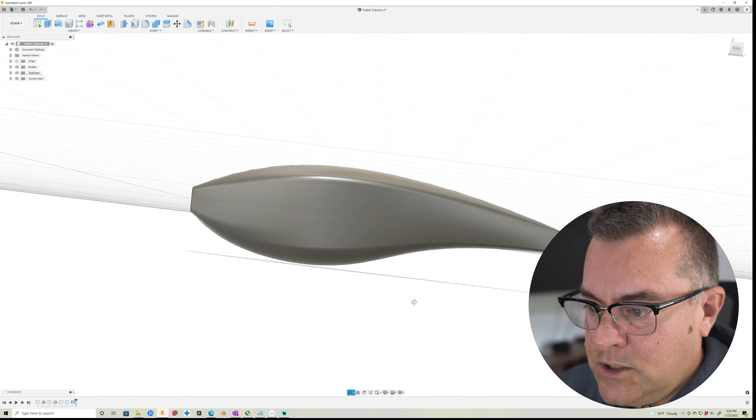Let's go. All right guys, so here's our twitch bait shape. I've messed around with it just a little bit, adjusting the curve, things like that, but it's pretty close to where we left off in the last video. What we're gonna do is break it into pieces first, and I do this to make it easier to kind of visualize the lure as it comes together and to hollow out certain sections.

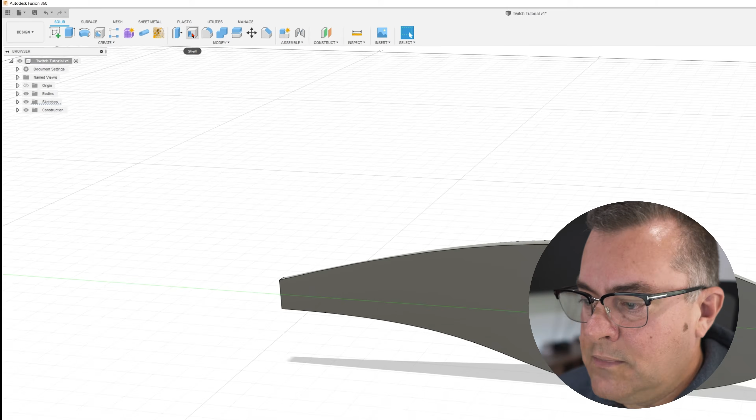Just to be clear, I wanna show you, if you wanna hollow out this whole section, we can just click on the shell tool, click on this face, and then we give it a number, which is basically the thickness of the shell. So let's just say 1.5 millimeters. It'll crunch for a while, and then I'll have a 1.5 millimeter edge all the way around, and it'll be completely hollow. So that's great if you're doing something like a topwater bait, like a popper, and you just need it to float.

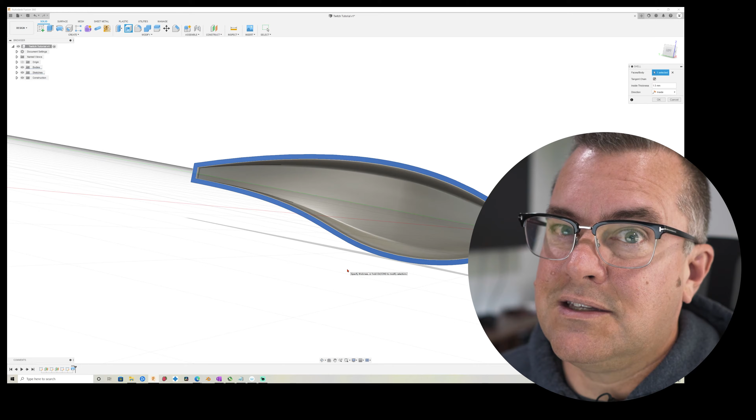Now, one thing, if you just make it hollow like this though, is it's gonna be the same buoyancy all around, and it might not sit right. It has a tendency to roll. So let's correct that. All right, I'm just gonna cancel out of that because that's not what we wanna do. I just wanna show you that bit.

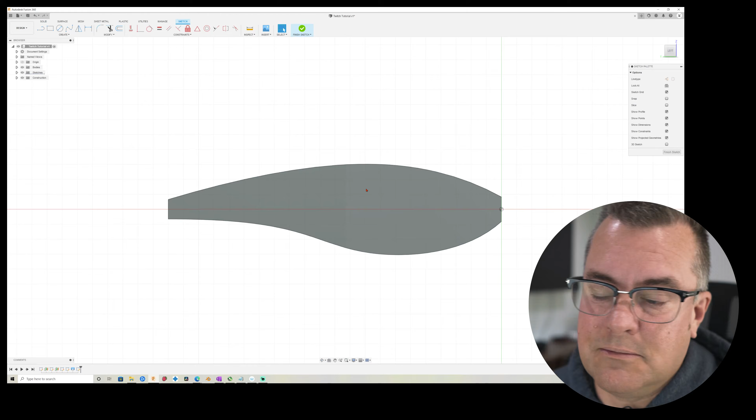So in general, when you talk about a lure, the back of the lure and the front of the lure tend to be solid, or at least more solid. And this is where we're gonna take advantage of some of the processes involved in 3D printing to give us a leg up over more traditional lure building techniques. So what I'm gonna do is just create a sketch on this plane. I could even create on that face if I wanted to. And I'm just gonna draw a line, and basically divide up the lure with these lines.

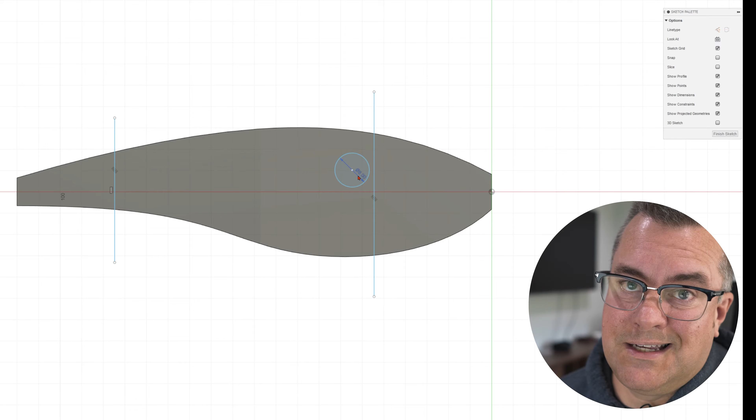Okay, and I'm actually gonna throw in an eye real quick. I'm just gonna make it an 8 millimeter circle. This will be kind of the size, whatever size you want it to be. Actually, no, I want it to be 10. And I do that for a couple of different reasons. One is it gives me an idea of where this eye will sit if I do end up wanting to make it a lure that is completely printed in one piece instead of 2.

And it gives me an idea of where in relationship to the hollow part and the solid part I'm gonna be. Now, I accidentally put a constraint on there, so I'm gonna delete that real quick. I want this eye to sit only in the solid part of the lure. So if you haven't figured out yet, I'm gonna cut this body into parts, leave this one solid, leave this one solid, and kind of hollow out this middle part to give me my buoyancy.

Now there's a lot of ways you can do buoyancy in a lure, but I'm gonna try to make it to where we don't really need to add any additional weight to have this lure act the way we want in the water, at least floating wise. All right, so I got these 2 bits in place. I think that makes sense. This is about 20 millimeters. Maybe we'll just stick it at 20 millimeters right there. And then I want to make one more line here, and I'm actually going to make this a spline.

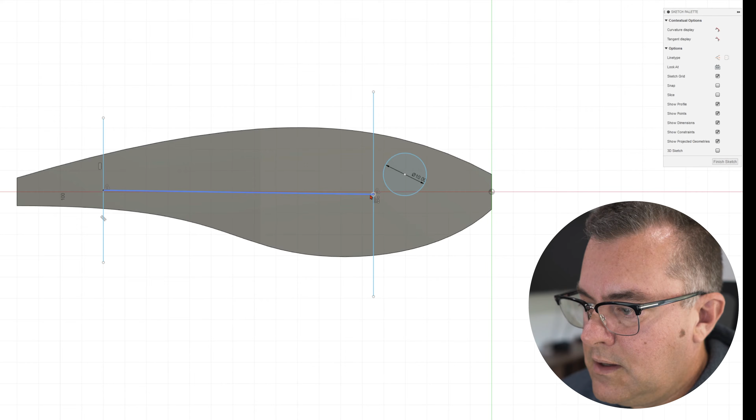I'm just going to connect that to here, hit escape, move this up, and put a little bit of a bend in it. Okay, so now I've basically laid out with these lines the parts that are solid and the parts that are going to be hollow.

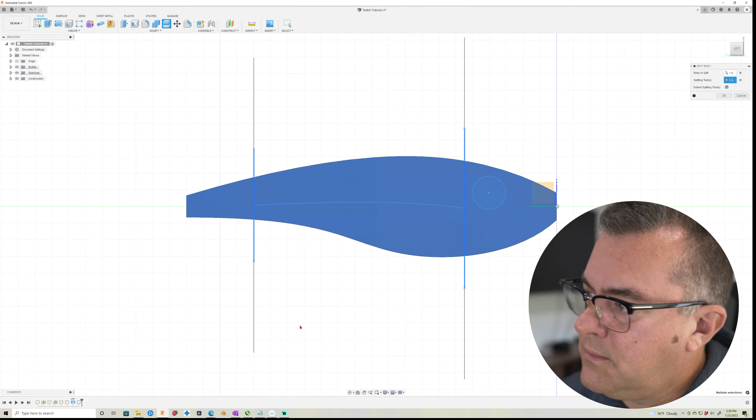Solid, solid, solid, and hollow. So now what I do is finish sketch, and I'm actually going to split this body up. Split body, splitting tools. I can use two splitting tools here because they're both going the same way. Extend splitting tools, that's fine, and we're going to split this lure like that.

Okay, so now I have 3 bodies over here. I'm going to turn off that one, that's the tail, and turn off that one, that's the head. And let's bring back our other sketch that we have here.

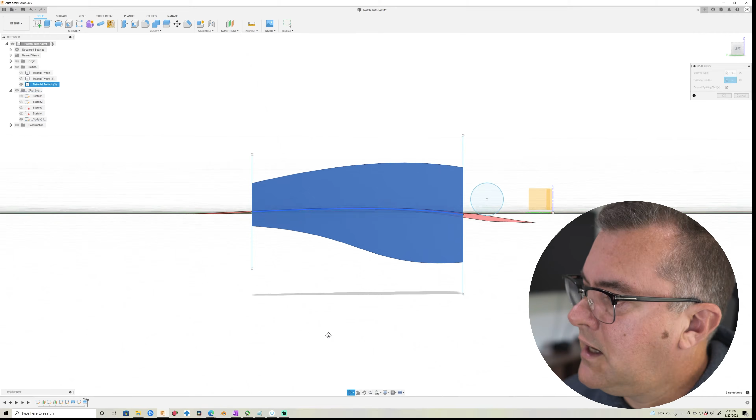Now we're just going to split this body again. Click split body, splitting tool is this line right here. You can rotate and see that. Click OK.

So now we have these 2 bodies here, a top and a bottom. Let's turn off the bottom because we want to leave that one solid, and we can turn off our sketch now. So now I have this little sliver of the lure, and I can use the shell command. Click shell, click this face, and let's say 1.5.

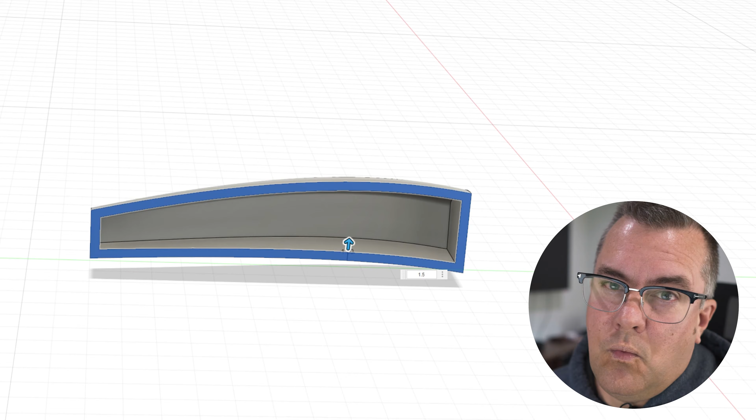Now, Fusion is terrible at shelling things. It'll frequently mess up, so sometimes you have to get all kinds of wacky with this. What happens is, in the corners here, if it gets too thick, Fusion doesn't like to wrap them and fill it in. So if I made this like 6, it's probably going to start complaining, yeah, it can't handle the computation there. So if you get errors or run into problems, just know usually you need to make that number smaller, sometimes by the smallest increments.

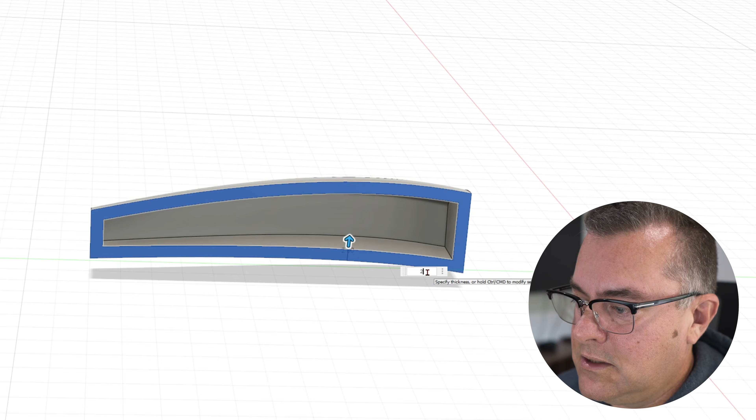I guess I'll make this one 2. That's fine. Now you can select multiple faces and bodies, so it's only going to hollow out one on the inside, and that's fine. So let's click OK, and that's going to make that.

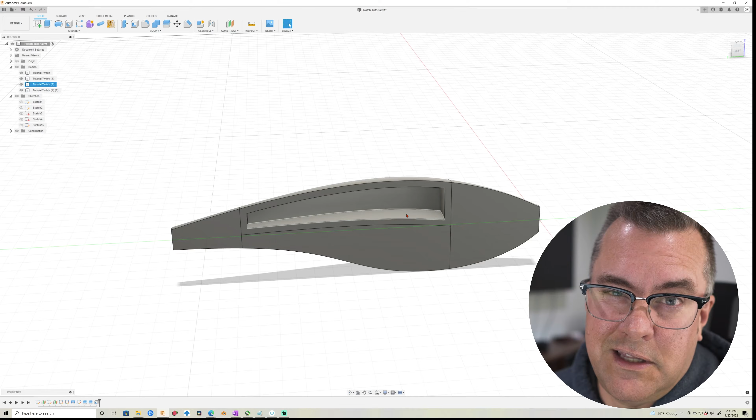So now if I bring back my bodies real quick, just to give you a visualization, what I've done is I've basically made an air cavity up top here. You can put your rattles in there, whatever you want, and it's also obviously going to provide buoyancy on the lure.

Now, all of this stuff is going to be solid resin and it'll be significantly heavier. What I don't know is if it's going to be heavy enough, right? And that's really, you know, you got to do some math.

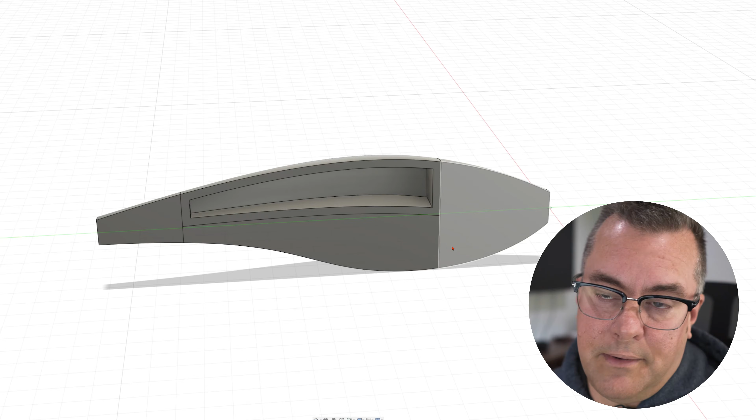I usually print a few and see what happens, making sure when you're testing them you add whatever rattles in there. If you're using steel rattles or steel ball bearings, it's obviously going to add weight, whereas if you're using plastic, it's not going to add weight, et cetera.

This is very much a trial and error process for me, at least right now, to figure out how much of an air gap I need there. Now, if you're printing it solid, obviously you're golden, you just print it and away you go.

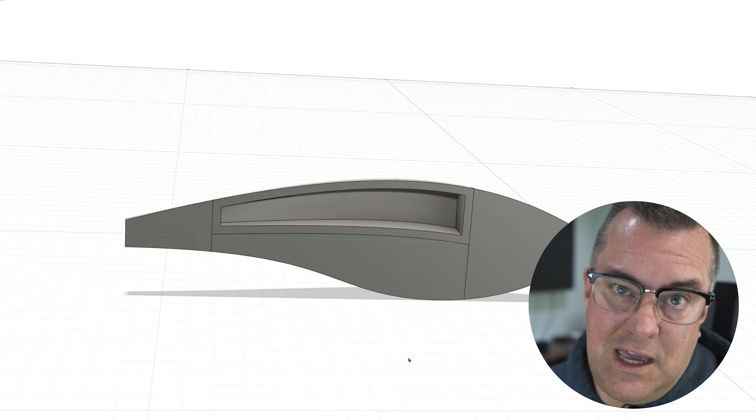So if you look at most commercial lures, you'll see that they have a lot of different chambers in there, and you can do the same thing here using the same technique that we just did.

So let's say I want to put a little cavity in the belly here, just a small one. I can go back in here and create a sketch. If I knew it ahead of time I would have created this ahead of time, but I'm just showing you now. I'm just going to make this one a rectangle for expeditious sake. That's not even a word, bro.

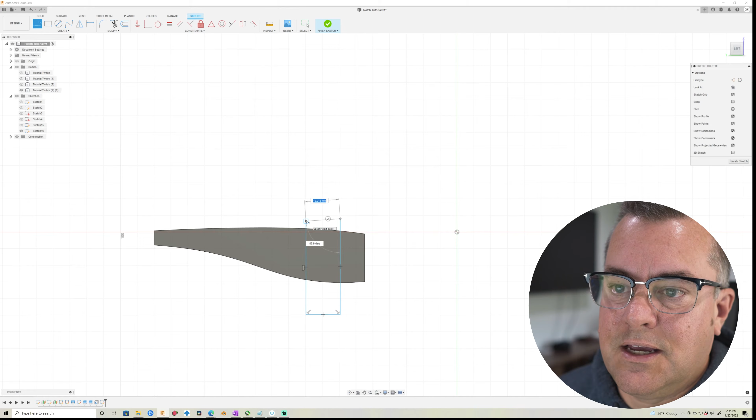Select that body as my splitting tool, and we're going to split it up there, click OK, and again, same process. Get rid of these. You don't even have to get rid of these bodies if you don't want to.

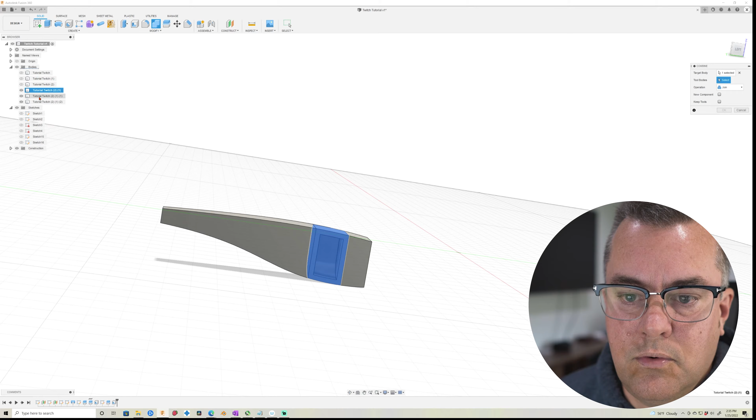I can just shell that 1.5, boom. Now I have a little hollow body in there, and I can just join these all back together. I click this, click combine, target body, go to tool bodies, boom, boom, and click join. I don't want to keep tools, click OK.

So now I have a little cavity in there. You can play around with those numbers, 1 millimeter versus 1.5 versus 2, whatever. And you can come back and do the same thing with the top. We're gonna fuse all these together.

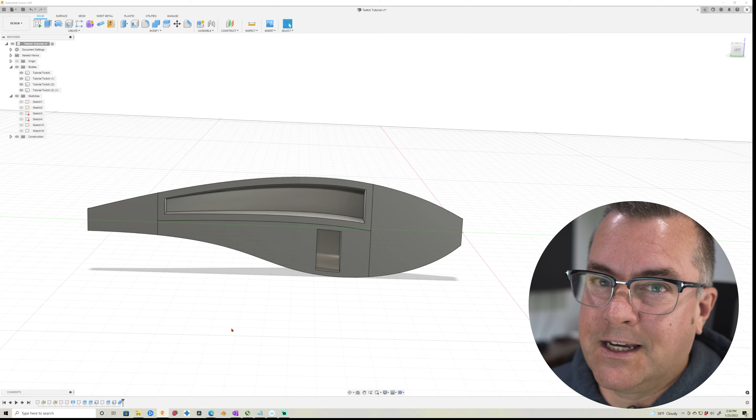But before we do that, I want to show you one little trick that's kind of an ugly hack, but it comes in handy if you want to use it. When we're hollowing this stuff out, we're primarily concerned about the thickness of this top ridge here. So if you get to a point where you want to remove some additional material, the easiest way I've found is to extrude these internal faces. Again, it's an ugly hack, but it works pretty well.

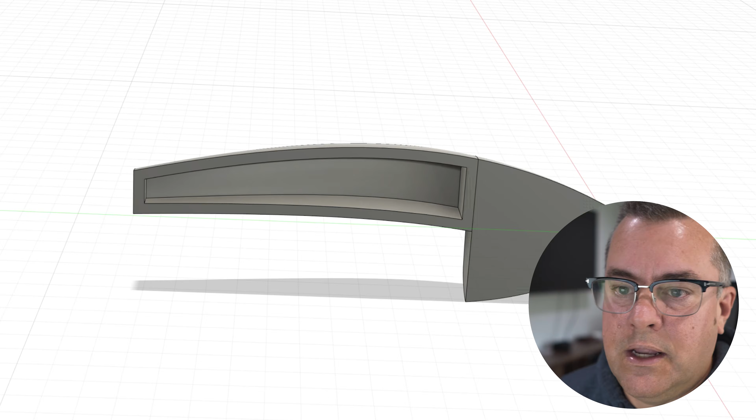Let's say I want to remove these end cap pieces here. This only works on straight faces - I can't extrude this face, for example, I'd have to run some more hacks, but it'll work on these flat faces here. So let me blow these out real quick.

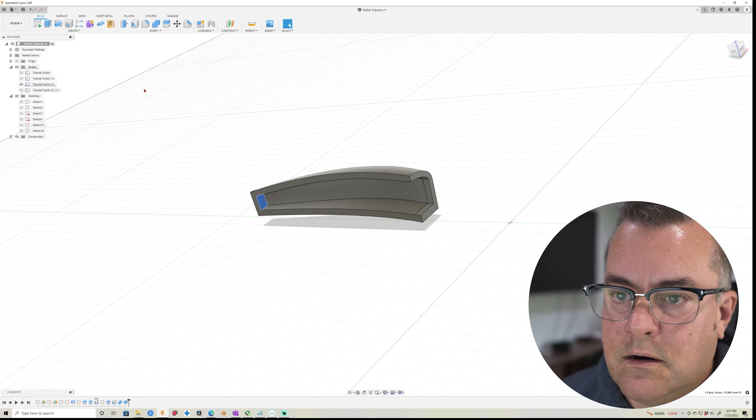I click this face, run it through, cut OK, and I click here, extrude, run it through the back, click OK. That removes a little more material if you need to open up this section to another section you have. You can go through and cut stuff out - I can't cut this out because it's not flat, but you could do some hacks there with the extrude command.

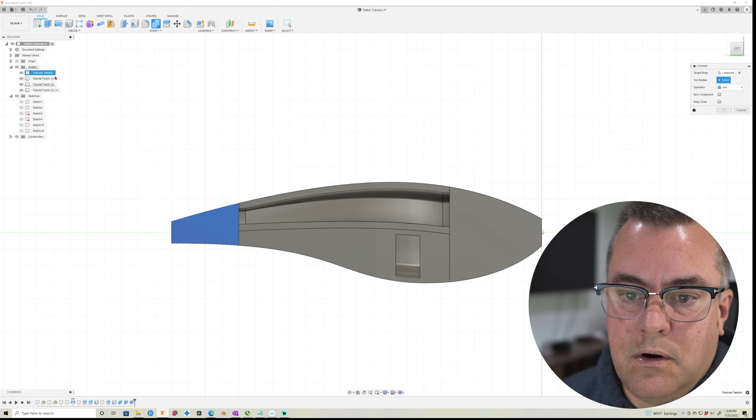Then we come back through and put everything back together. I like to start with whatever body ended up keeping that name, click combine, select all of these other parts - just holding down the shift key there - join, and boom. There we go. You can see that extrusion gets a little weird, it doesn't follow the path, but hey, you do you, bro.

So a quick side note here: these belly cavities support rattles that go side to side very quickly as the lure is wiggling, whereas the longer cavities up top really support when you jerk the bait - the rattles or balls will slam back and forth and make a lot more noise. So that's the reason for those two different cavities.

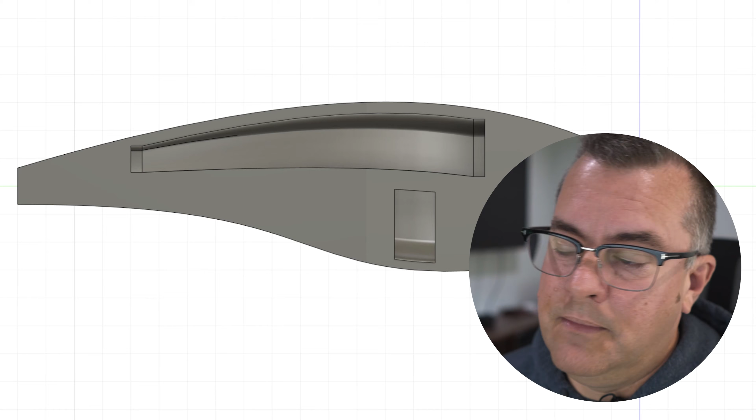Now, since we're gonna do two halves, we're gonna want to glue them together and we're gonna want some alignment pins. What I've seen a lot of people do is make a round pin, stick it to one side, then put the hole in the other side. I find that doesn't really work well, so I'm gonna show you the process I use that I think works best.

To start off, we're gonna just decide where we want our alignment pins to be. I know in this lure I'm gonna have a screw eye here in the front, a screw eye in the back, and probably a screw eye in the bottom, maybe right here for my hooks. I actually probably put that cavity in a stupid place, but we're gonna put a screw eye right here. So I wanna avoid those areas. Maybe right here would be a good spot for an alignment pin. Gonna have my eye up here somewhere too.

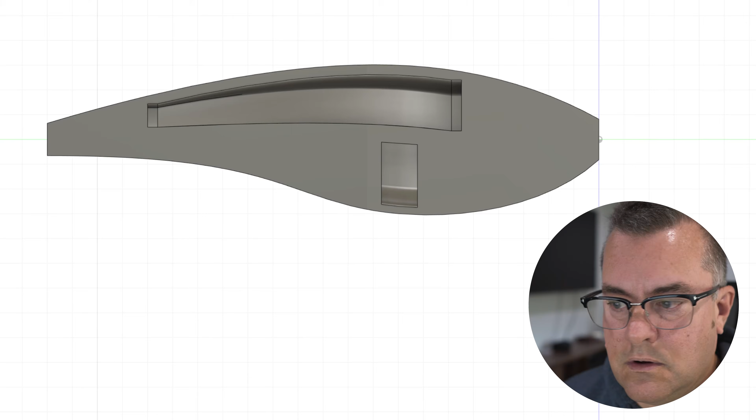If we turn that sketch back on, my eye is gonna be there. Shouldn't really impact the alignment at all, but if I can help it, I just wanna avoid that area. So let's do one here, one kind of in this belly area up close to the top, and one kind of in this front area. This is a twitch bait, so I'm not gonna have a lip here, but if you had a lure with a lip, you'd kind of want to avoid that area as well.

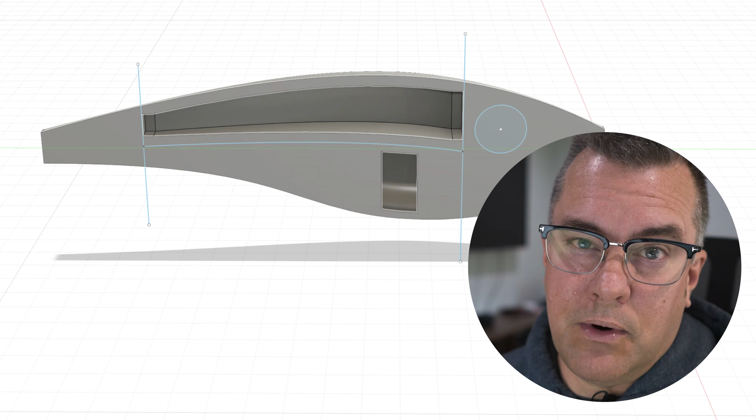And you don't necessarily have to do these alignment pins now. You could wait until you did a lip. I'm gonna have a whole video on making crankbait lips and incorporating them into your lure bodies coming up soon. I've made some really cool discoveries in that area for 3D printing, but today we're keeping it simple with a twitch bait, so I'm gonna put a pin right here.

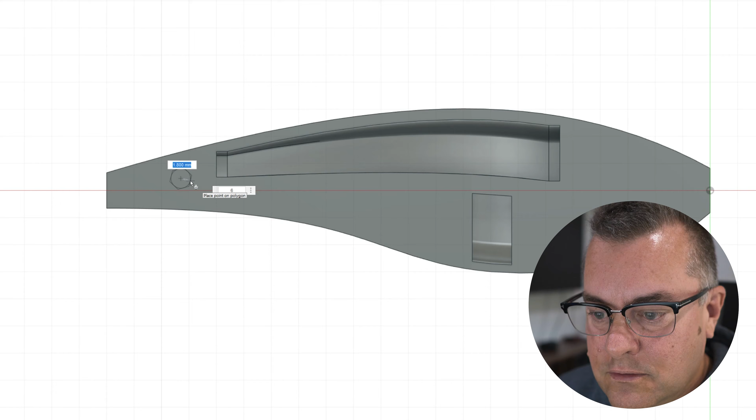Okay, so what we wanna do now, let's turn that sketch off, create a new sketch. I'm gonna create it right on this face. And what I'm gonna use is actually polygons, circumscribed polygons. And we're gonna end up 3D printing these, so the bigger the better, actually. 2.5 is probably good. All right, so we got a 2.5.

We'll go ahead and create another one here, polygon circumscribed. So we want to keep them all the same size, and that will just make it easier when I go to assemble the lure if they're all the same exact size. This would be a good use for a parameter. Once you decide how big you want your hexagon, circumscribed polygon to be, kind of in all your lure builds, it's a great thing to put into a parameter so you don't have to remember these numbers going forward.

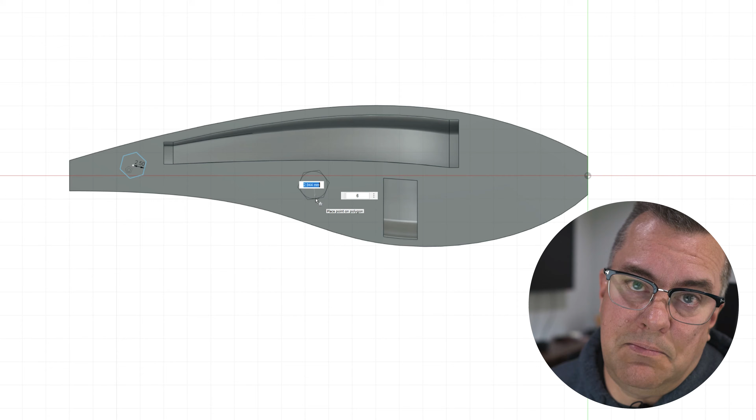And then you can actually print out a bunch of these pins in one shot and not have to print them each time you want to print a lure. So let's see, can we fit a 3.5 in there? Yeah, all right. Can we make this one a 3.5? Ooh, that's cutting it pretty close.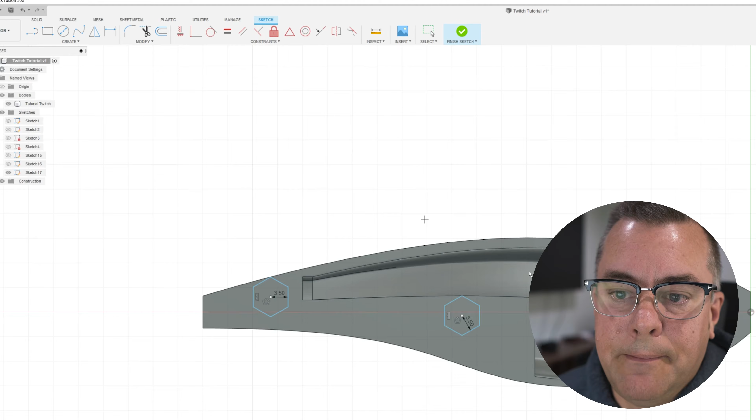Then I'm going to, just for giggles, we're gonna make that one horizontal, vertical there. And let's create another circumscribed polygon up here in the front, 3.5, boom, and make it horizontal, vertical here. Hit the escape key, and now we can kind of move these around and see. That looks pretty good. Move this guy down.

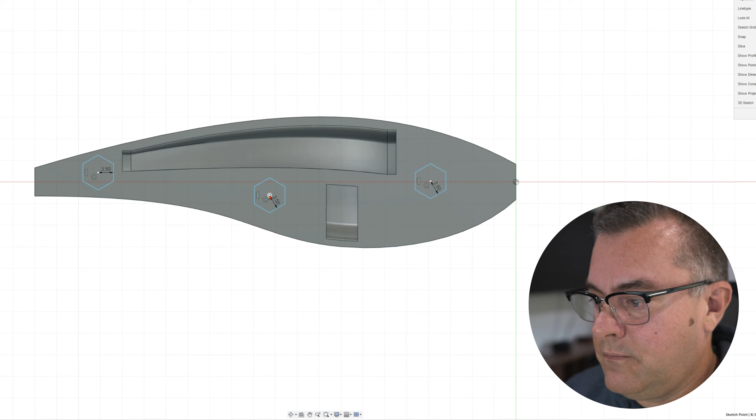So in case you haven't figured out yet, we're gonna extrude these out and we're gonna cut holes in the lure body itself for alignment pins, in this case, hexagonal shape alignment pins. So I need to kind of avoid areas where I have my voids. Avoid the voids, bro. Okay.

So we can finish this sketch. Now I want to extrude. I'm going to select all of these guys. I'm going to say symmetric, and all right, we can kind of eyeball the distance here. You know, probably, see, that back one is tricky. Let's just make it a 2.5.

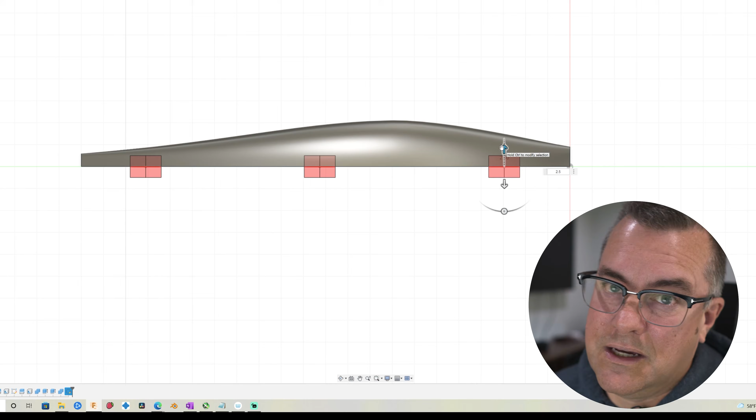Now the smaller I make these things in circumference and depth, the harder they are to kind of deal with alignment-wise, but they generally need to be kind of small. I already have them fairly large there on the diameter at 3.5, so I think we'll be okay. Now, the key here is I want to do a new body. I don't want to cut these just yet, and I'll show you why. So we click OK. All right, so there we go.

Now, the cool thing about hexagons instead of circles is that circles, when you put a lure together, you can still turn it and twist it. With a hexagon, they're gonna slide right in there and lock into place, and you're not gonna have any potential for twisting. Now, the downside is that if you have any kind of variations in your printing or anything like that, it can make alignment and fitting them difficult, but we're gonna compensate for that, and I'll show you how. At 51, I compensate for a lot of stuff, so I know about compensation.

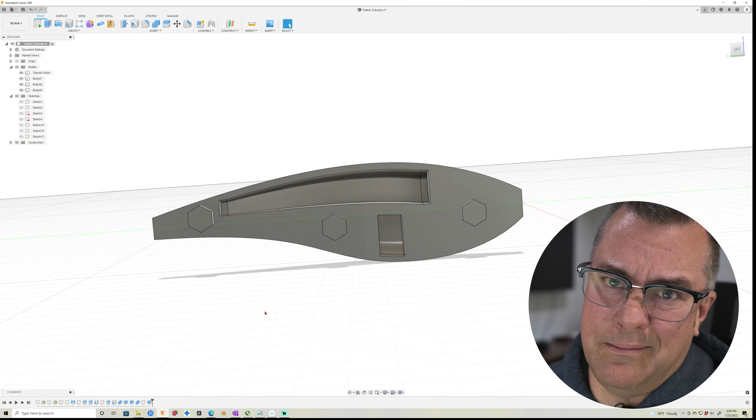Okay, so now what we're gonna do is we're going to combine these together. So here's my target body, the big guy. My tool bodies are all these. Now the important thing here is we wanna keep tools and we wanna cut. So that's gonna cut my little holes out and it's gonna keep my pins. I need to keep those around right now because I've never printed them before.

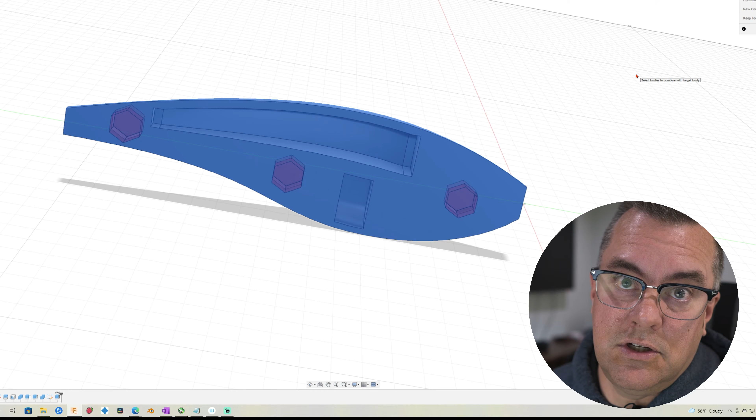In the future, if you have a bunch, you don't need to necessarily keep these around. And we click OK. All right, so now let's hide our body. Let's rename these pins. Now again, these are all the same, so I'm not gonna need to export and print all of these. I'm just kind of naming them so I know what I'm dealing with.

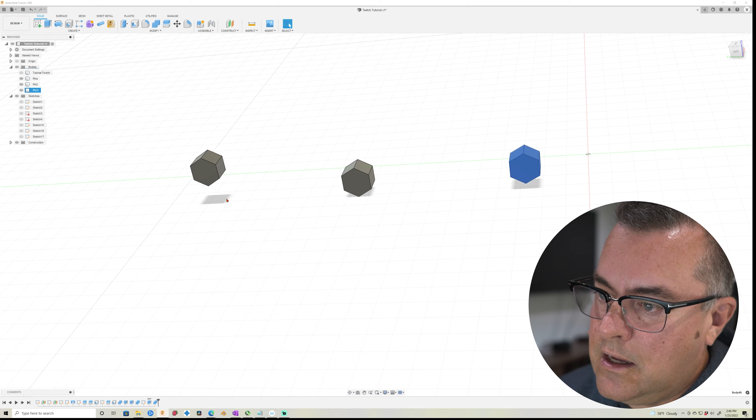Okay, so now we're going to come in and click these back faces and front faces, and we're going to hit the F key for fillet. We're going to put a slight fillet on each of these edges because when I go to print them, I'm going to print these faces flat to the build plate, and that's really going to give me my best result.

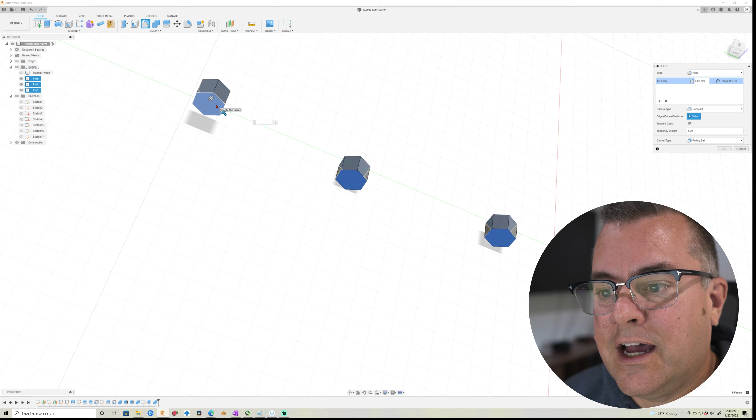So by putting a fillet on it, when the edge is flat to the build plate, it gets what's called elephant foot - it gets a little bit bigger because it's overexposed. By putting a fillet here, we can compensate for that and still get good fit. So probably like a 0.5 fillet - you don't want to deform it too much and you still want to have some meat in this part of the pin. Let's go 0.8. These are gonna be so small, it's gonna be annoying.

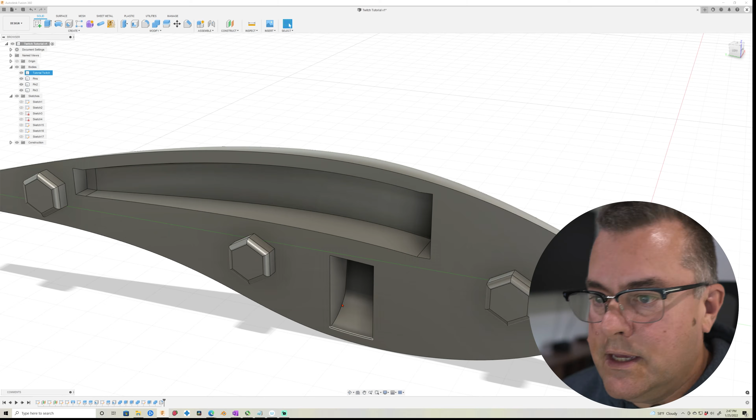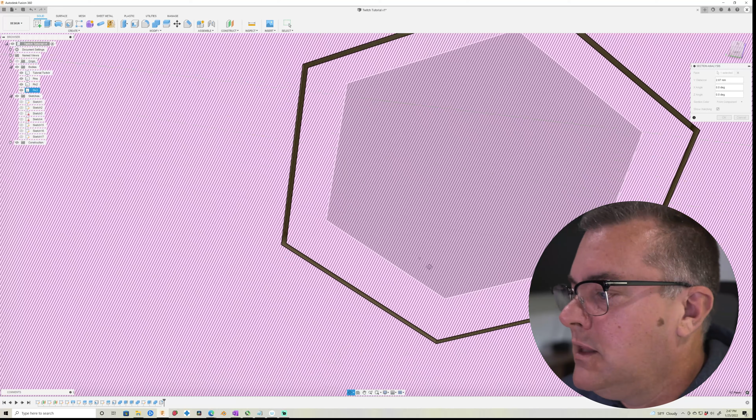But hey, then we'll click OK. So now what we've done, let me bring back the body. The reason I did it in that specific order is if we go look at a cross section of my lure, when you get to the back you see that little gap there, right there? That's because when we joined it, we didn't have the fillet on, so it cut out the non-filleted hole. And then we added the fillet, which cut this material out from our pin.

So this makes it slightly easier to deal with any variations in the printing, especially on this edge that's going to be against the build plate when we go to print this pin. You could obviously put them off the build plate and use all kinds of supports, but I find that to be a real pain in the rear. It's much easier to just smash them on the build plate and compensate for it with a fillet.

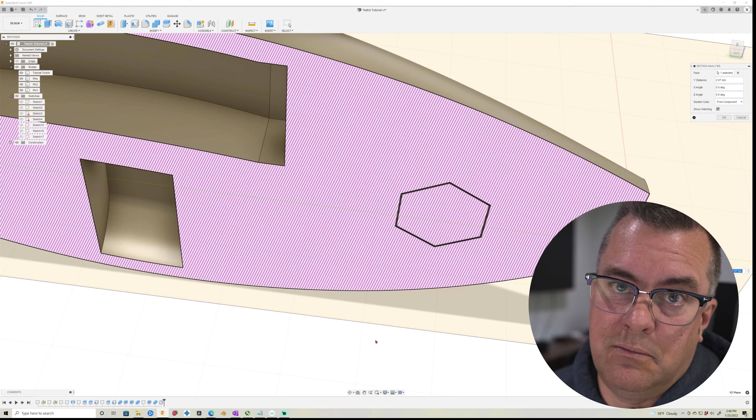All right, let's cancel that. And there we go. So now we have our pins, we can hide them, and we have our holes that the pins are going to go into.

Now you can add another fillet around this edge if you want to. So I'm going to select all of these edges here and add a fillet. The reason I'm going to do that is we're trying to give ourselves the best chance of having these two things slide together relatively easily, but tightly, when we're 3D printing.

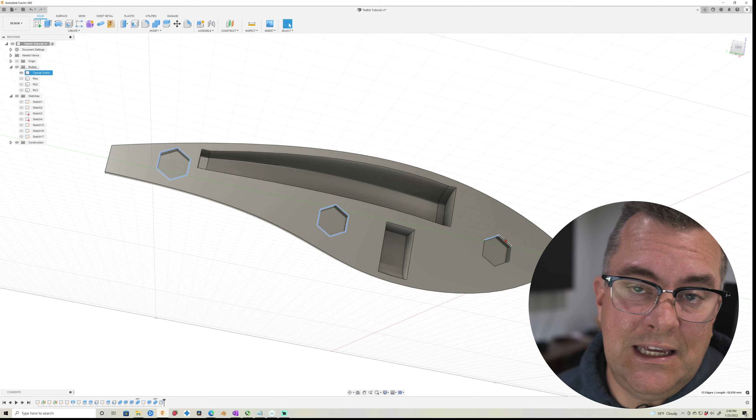So a good thing to do once you get your printer set up and printing and your resin really dialed in is you can do a test print of a very simple hole and a pin. I use a 10mm pin and make a 10mm hole, print it out flat on the build plate, and it should slide right in.

Now the tricky part comes when you're printing one piece in a different resin and the piece that's going to slide into it is in yet another resin. We'll talk about that more in detail when we cover the crankbait lips, because I do print those in a different resin than I print my bodies, and we'll talk about how you calculate and compensate for that. But print these parts and slide them together.

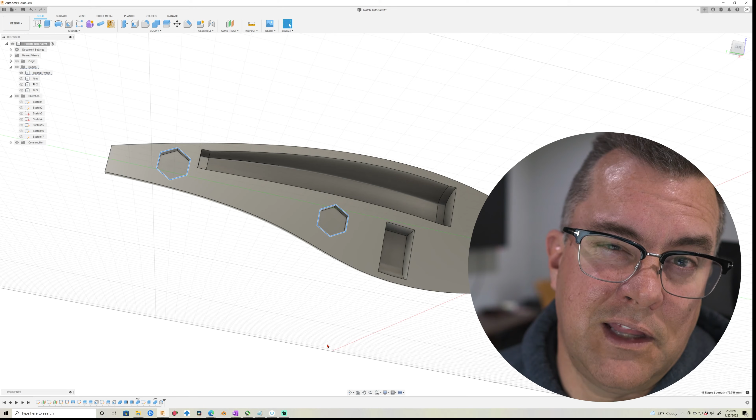You should see that on the bottom you have an elephant's foot, and it should stop it from sliding all the way through. Then you can start adding a fillet and see how much of a fillet you need to compensate for the elephant's foot on that particular part. If you want to download my little test model, there's a link in the description below.

Okay, so we've selected all those edges. We're going to hit fillet, and let's maybe do 0.5 there as well. Again, we have a relatively small area of these flat surfaces here, but I think that's good.

So now what we're going to do is add the pilot holes for my screw eyes. If you're going to do a through wire, some sort of wire harness, the process is the same from a Fusion standpoint - you would just draw the lines I'm about to draw in whatever path you needed for your wire harness. You'll see what I mean.

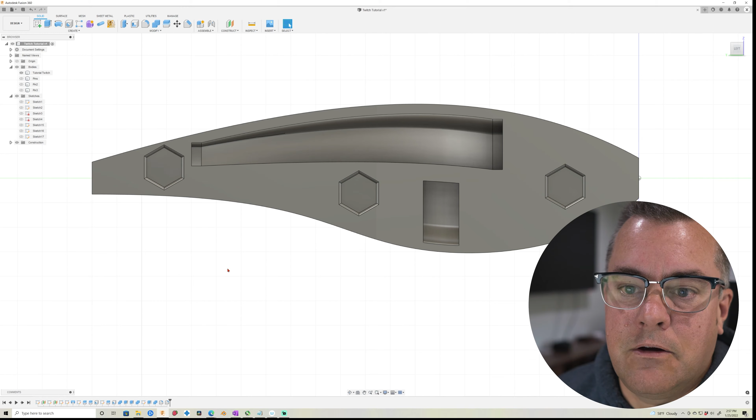Okay, so we're going to do a new sketch. I'm going to click this back face again, use a line tool, and I'm just going to go from the back, putting this on a slight angle.

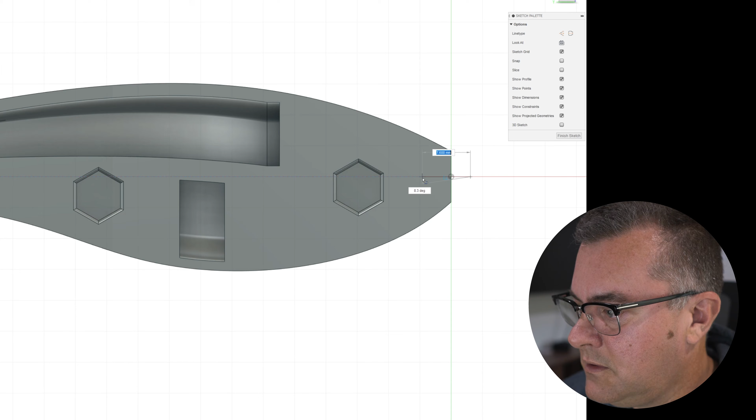I probably should know what this angle is, but I'm just going to wing it. I should also know what length I need. 8mm is probably okay. Now, what we're doing here is basically laying out where our screw eye holes are going to be. So I'll run with one right through the center here, and let's bring one up right here through the belly. Now, obviously you can put these wherever you need to, but that's what I'm sticking to.

Now we finish sketch. And I'm going to use the pipe command now to cut out these holes. So I click pipe, and I'm going to click that. And I know I need 1.45. So this is another number that you're going to have to figure out on your own, depending on what screw eyes you're using, what wire you're using, etc. You're going to want to print out a simple block, make a bunch of holes in it of various sizes, see which ones fit your hardware.

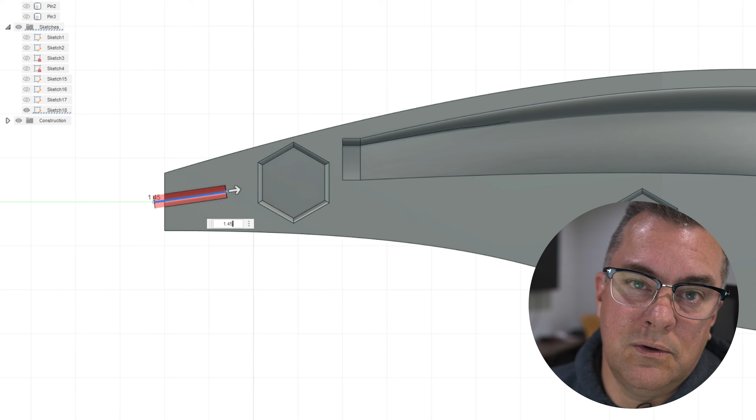I know this one works for my resin and the screw eyes I'm using. I can screw them in there. It doesn't blow apart the lure, and I get a nice, good bite. Your number will be different. All right, click OK. Let's bring back the sketch again. Create pipe, same thing. It should save my number. Yep, and one more. Boom.

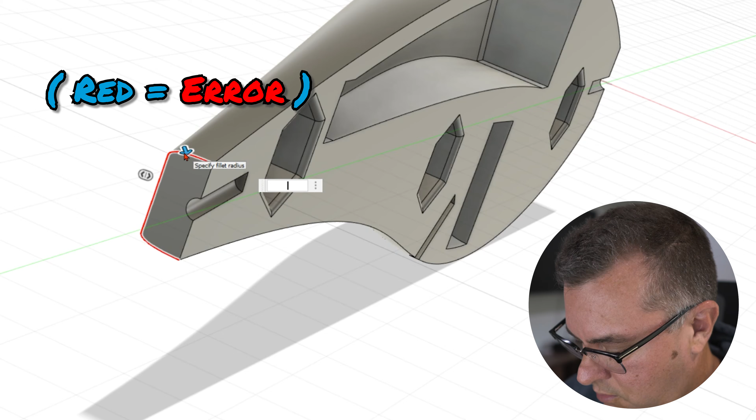All right, one last thing we're going to do here is fillet that edge. I hit the F key for fillet. You can click fillet up there. And let's see, maybe a 1. Nope, it's too much. 0.5, too much. 0.3, 0.4. So I'm going to put a slight fillet on the tail. I'd like it to be a little bit more, but the angles aren't working out. So I'm going to do a 0.3 there, and I'm going to come up front.

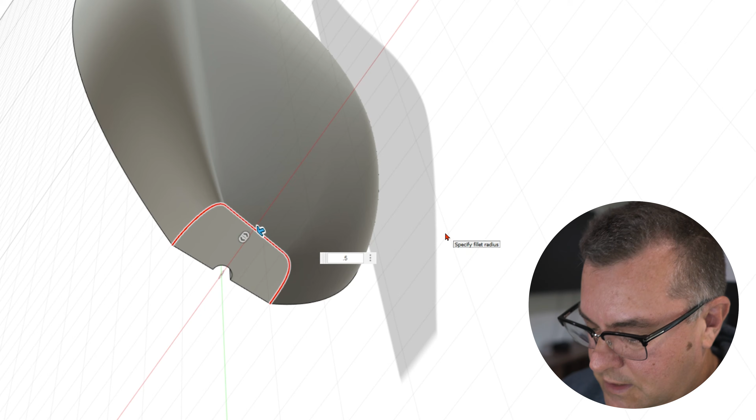Now, let me show you a trick here. I hit enter to get out of that fillet command, but you can just come over here and click plus and add this edge and see if you can add a bigger fillet on there. So that's a downside to using more angular sketches there, is the fillets become difficult. Okay, so now I got those edges done. Now comes the exciting part.

Now we go to create, mirror. We want to make sure this is on bodies. It'll default to faces. Click that body. Our mirror plane is going to be this plane right here. You could also click this face if you want to. It doesn't really matter. And you'll see it pop into place. And there is our lure body.

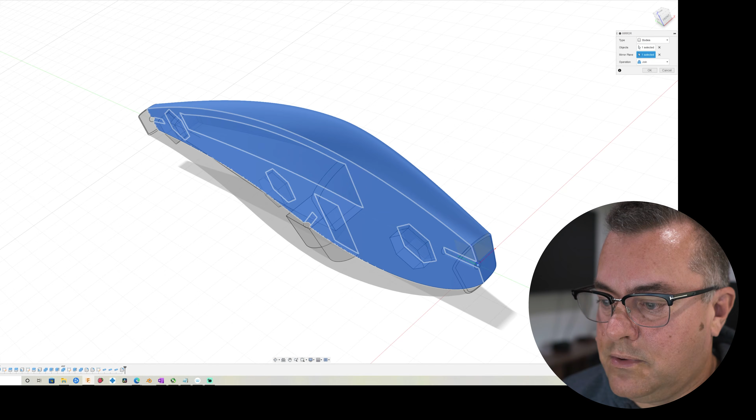And we want to make sure we are new body. We don't want to join them together, because we're going to actually print this in 2 parts. If you were going to create a lure that you printed completely in one piece, you could join them at this point. We'll discuss that in a future video. We click OK. And there we go. I have my very basic lure body.

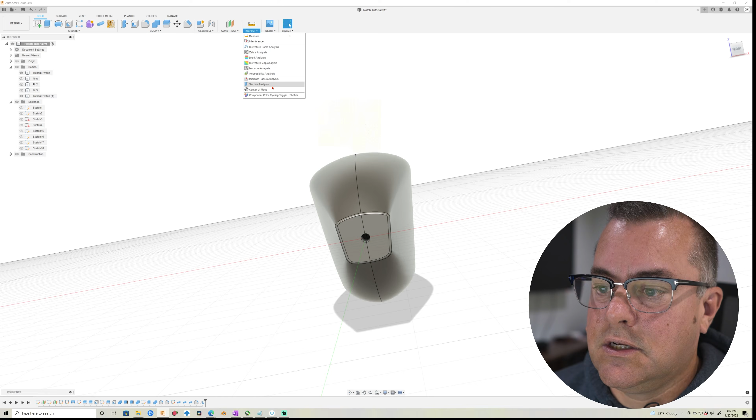If we take a look at the section analysis, we scroll this back, we have our screw eye pilot hole, we hit the pin, we hit the top hollow part, little belly weight area, the pin, there's our pilot hole. Come on back, we have another pin back here, and then we run into our pilot hole there. And there we go.

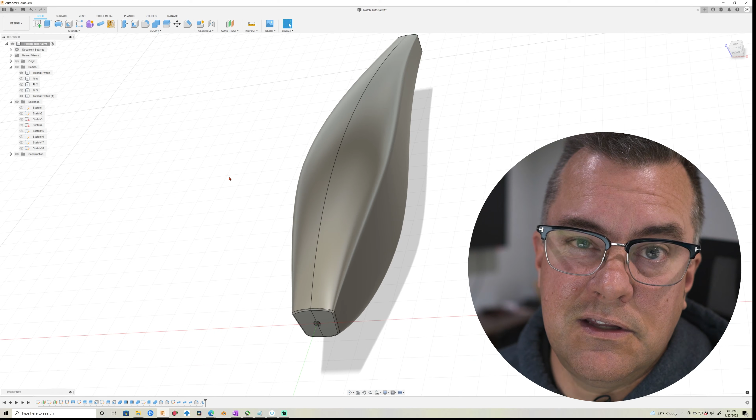Okay, so now is a great point to probably print out this lure and see what it looks like in your hand, see how it feels, and see where you want to make adjustments. You want to get all of that out of the way before you spend a lot of time working on details like eyes and gills and fins, because that stuff is very delicate and will break if you start making major changes to the lure body. So we want to get this thing nailed first.

So we're going to discuss exactly how I set this up in the 3D printer in a future video after we add the details, but just throw it in there and try to print it however you think makes sense and see how it all fits together. Especially if this is the first time you've made this lure, it'll really, really help you out.